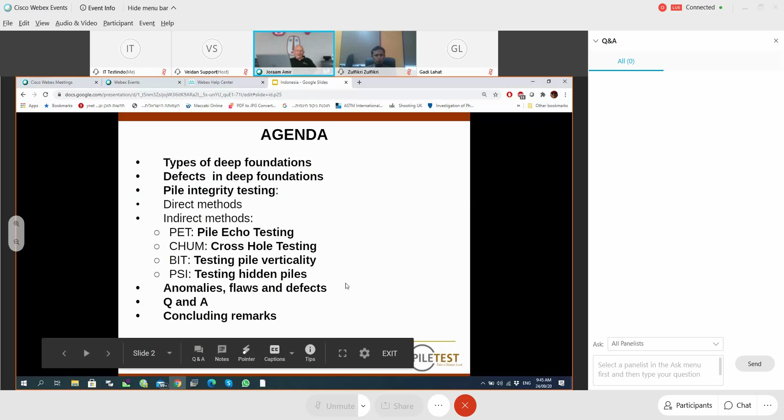I'll try to put some order in three terms that are very frequently mixed. And these are anomalies, flaws, and defects. And I hope we'll have some time for questions and answers and some concluding remarks. First of all, what is a pile? A pile is a slender, deep foundation, either prefabricated or cast in situ.

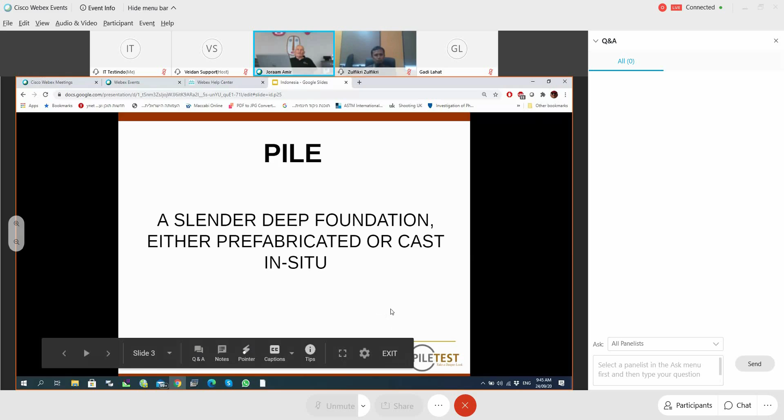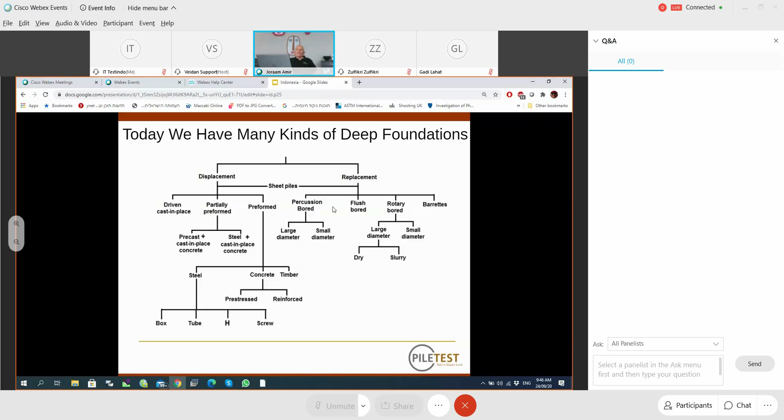these piles is not very good. At least the contractor puts some steel in the ground. Some contractors even do not put steel in the piles. This contractor was very clever. He knew that he is going to produce the piles in sandy soil, which is not very stable. So we used some casings out of cardboard. But you see that below the casing, there was some collapse, and of course, the pile is not good.

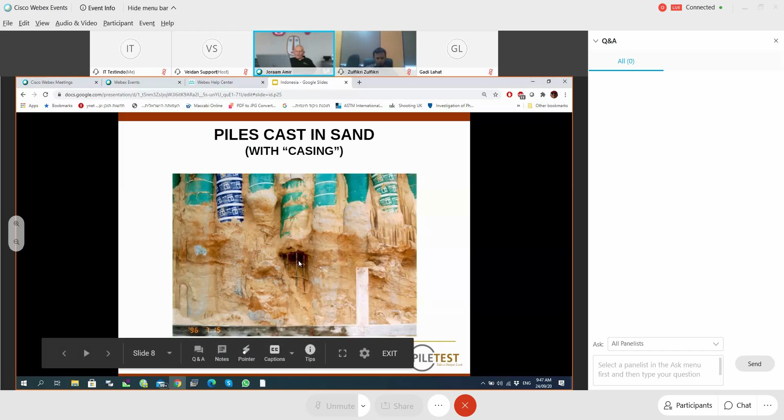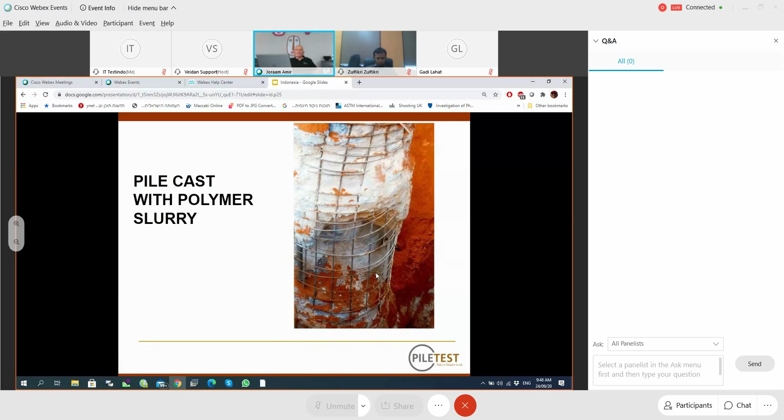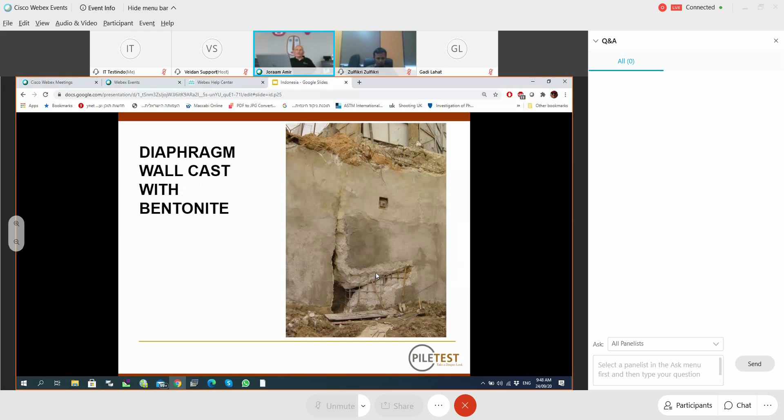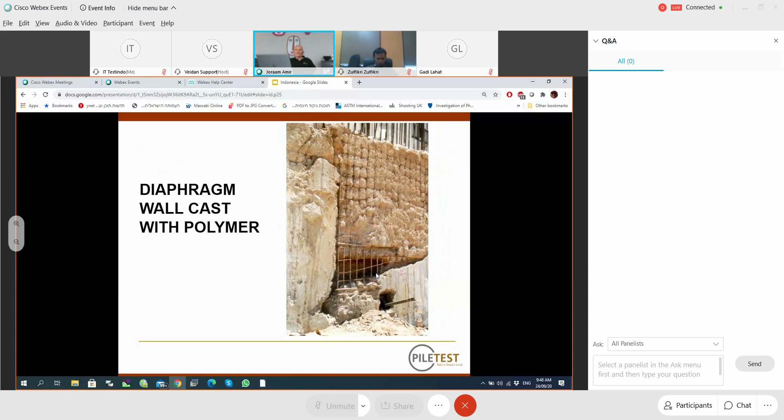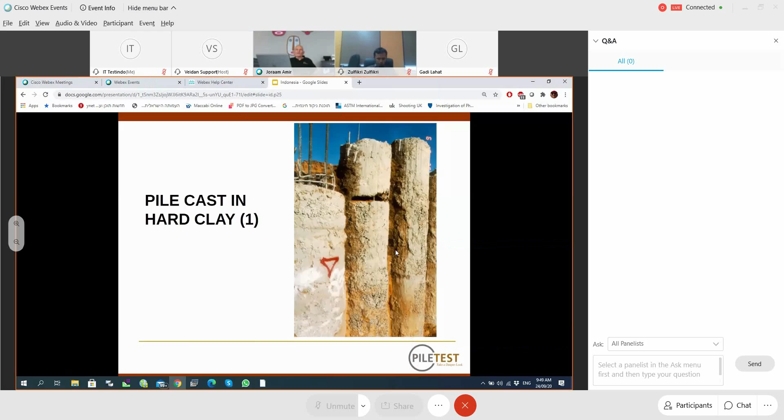This is a diaphragm wall for a basement, and it was cast with bentonite to support the excavation, and still the end result was very unsatisfactory. Here's a diaphragm wall cast with polymer slurry. Different technique, but the results were not much better, even worse. Now, even under ideal conditions, when you have stable ground, hard clay, no groundwater, no chance for collapse, you can have this situation. Or this one, which is almost a complete discontinuity of the concrete.

Now, how many flaws or defects do we have in piles normally? I collected some information from our files and from literature. For instance, 1.7% of piles with flaws, this is from the early 70s and 80s of the last century. Now, this is a very low percentage, and for two reasons. First of all, at that time, the testing instrumentation was very rough and very inaccurate. So there were many defects we couldn't discover or expose.

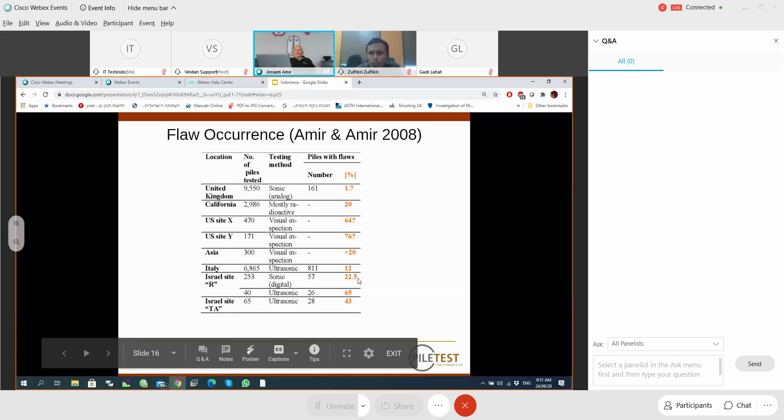And the second reason for this low percentage is that in this case, the testing was done by a contractor who tested his own piles. And of course, it's very difficult to be very neutral and very objective under these conditions. No contractor likes to admit that he's producing faulty piles. But when we go to different places in the world, California, somewhere in Asia, Italy, Israel, we see that the percentage of piles with flaws can be much, much higher. And it can be alarming. And this raises the question of pile integrity.

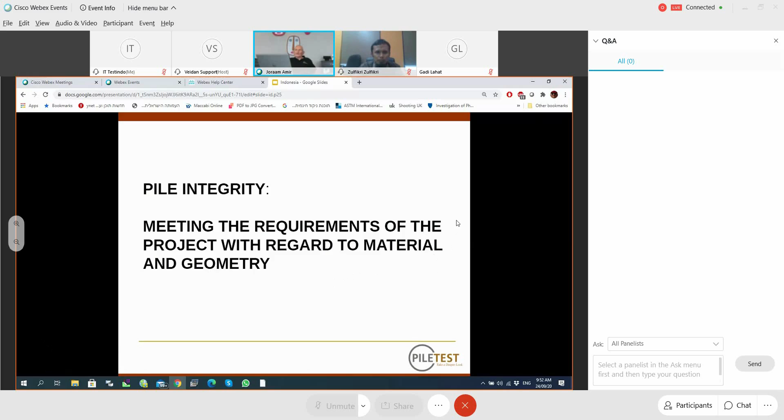There are many definitions of pile integrity. The way I define it is meeting the requirements of the project with regard to material and geometry, which means we have drawings and we have the specifications, and these determine how the pile should look like and what is the material it should be constructed of. Now, sometimes we have integrity problems, like flawed material. Here we have a pile produced of good concrete, and somehow here we have a pocket of poor concrete, result of poor construction technique.

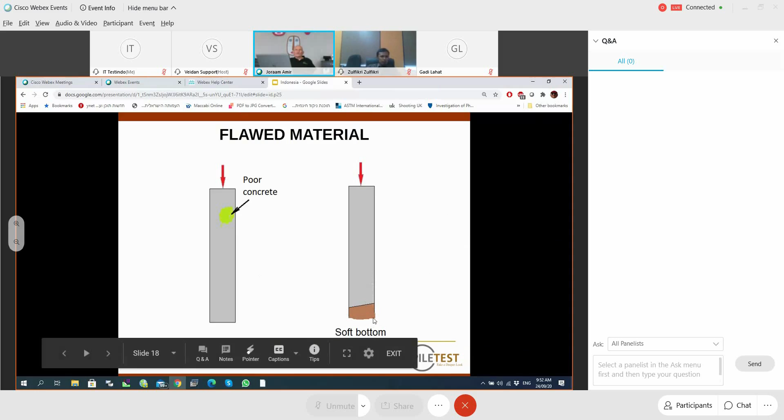Here is a soft bottom, which means during casting or some collapse, the contractor didn't clean the bottom very well, and we have the bottom or the toe of the pile consisting of soft clay or soft debris. Now we can have an abnormal geometry. For instance, a pile can be short. Sometimes because the drilling equipment was not powerful enough to penetrate the hard soil. Sometimes because the contractor didn't have a strong enough machine or just wanted to save, assuming that he will never be

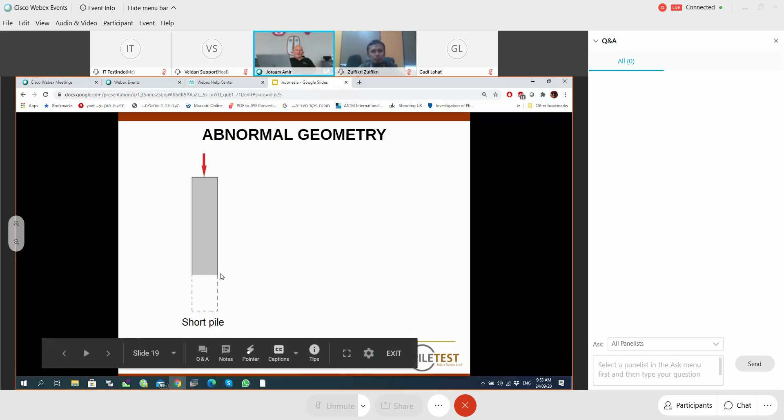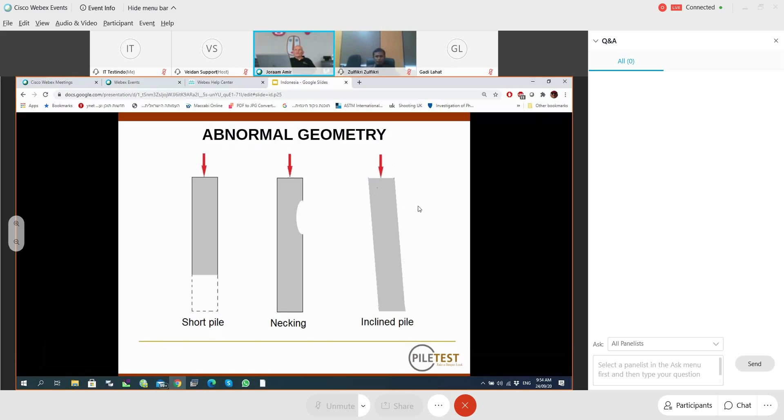checked. Here we have necking. This is a collapse that happened during casting, and instead of concrete, we have here mud or some foreign material, and we get an abnormal geometry of the pile. And sometimes we can have an inclined pile, a pile which had to be vertical is not very vertical. And this is, of course, also contrary to the specifications.

Now, we have integrity testing techniques, which I'm going to tell you about today, and they are used to discover defects before they can cause any damage. If you build a building or a bridge or any other structure on faulty piles, they can cause a lot of damage. If you manage to locate and expose these piles before you build on them and before you apply the load, you can avoid a lot of damage.

There are two families of integrity testing methods. The first one and the oldest one is excavation. If you suspect that your pile is not very sound and there may be some defects, you can just excavate around it, and sometimes this is what you discover. Of course, you must have some suspicion that something is wrong with this pile. Of course, you cannot go very deep with this method, especially if you have high groundwater level.

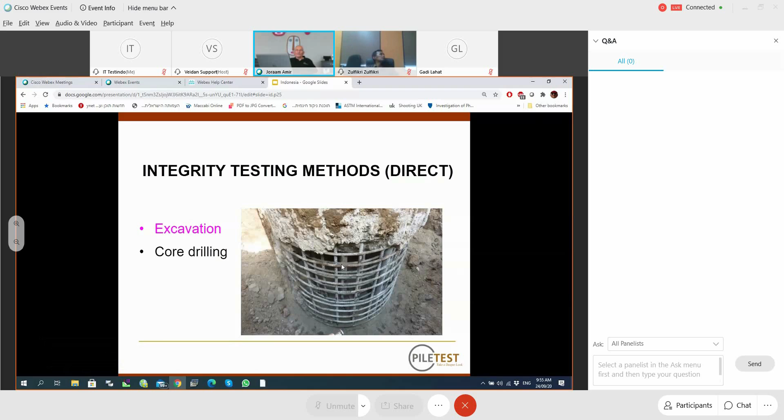The other direct method is core drilling. Here you can go very deep inside the pile and get a very good sample of the concrete. Of course, this relates only to a very small percentage of the cross-section of the pile.

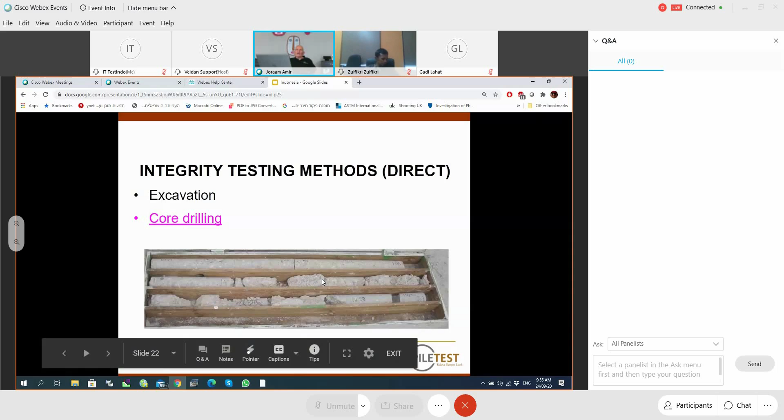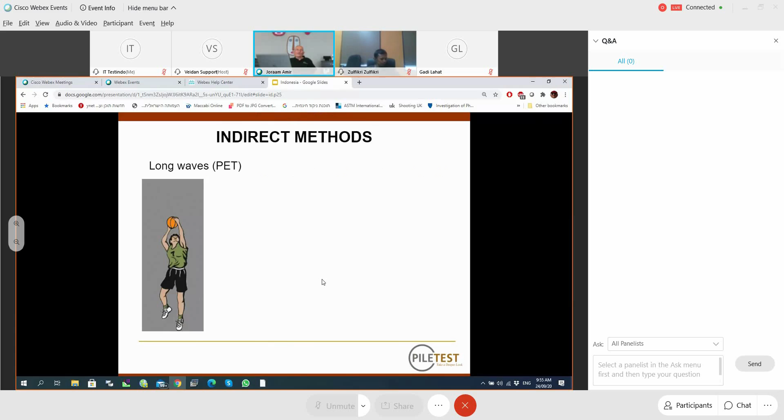In addition, we have the indirect methods. And here we have two families of methods. We have long waves and we have short waves. On the left, we see how the long wave behaves in the pile. It can move only in one direction, either up or down. The short waves, or the ultrasonic waves, can behave like a mouse. They can go up and down, sideways, and in all directions. So we have two families of indirect methods, the long waves and the short waves.

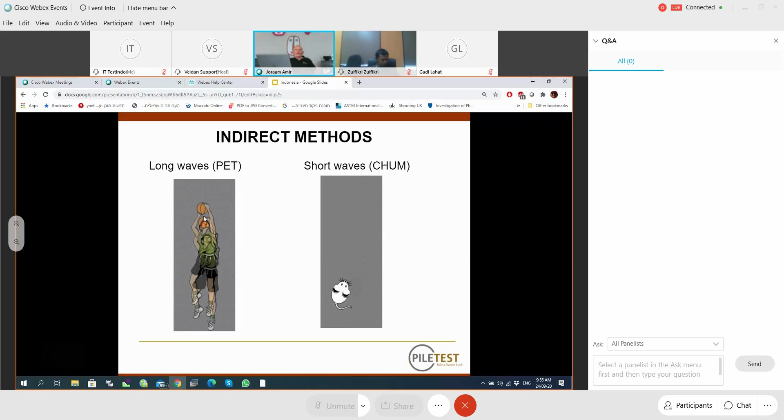The first long wave method is the sonic method, or the sonic echo impact method. Here we'll see soon a short video showing how this method is applied on site. Do we have that video?

Yes, we have. PET, Pile Echo Tester, Low Strain Impact Testing. The mission: test the integrity of 12 concrete piles on this construction site. The tester goes to the first pile and prepares the top for testing. You have to clean the top of the pile first. A small amount of special putty is attached to the bottom of the PET to get good contact. The PET is pressed against the pile top. The top is lightly hit with the hammer. A compressive wave travels down the pile. The energy of the hammer is enough to reach the toe and is reflected back from the toe.

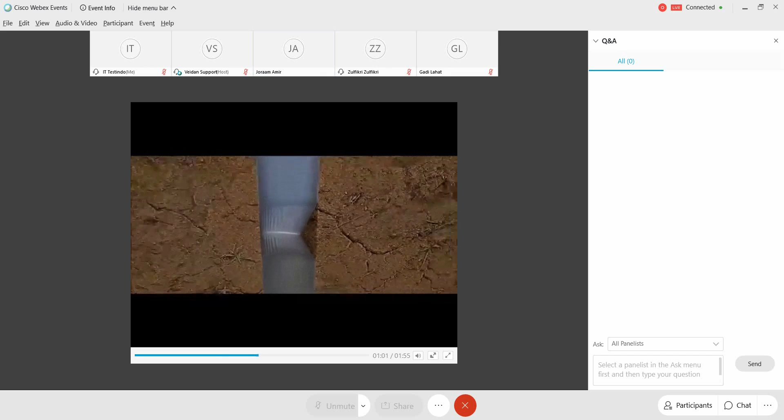The blow is recorded on the screen. Good pile. The next pile has a defect that reflects the wave. Wave hits the defect. The reflectogram on the screen shows a necking at a depth of 5 meters. That's all. The test results are now analyzed in the office and the report produced.

So this, in short, is the long wave method, the PET. The instrument works very well with a smartphone as a data logger. So what you see here can be a smartphone or a tablet. And if you have a smartphone, you can use all the other properties of the smartphone. For instance, take a photo of the top of the pile, or register the GPS coordinates of the pile. And of course, you can save the results in the cloud, and therefore they can reach the main office on the other side of the globe immediately. So you don't have to wait for the results until you return to the office.

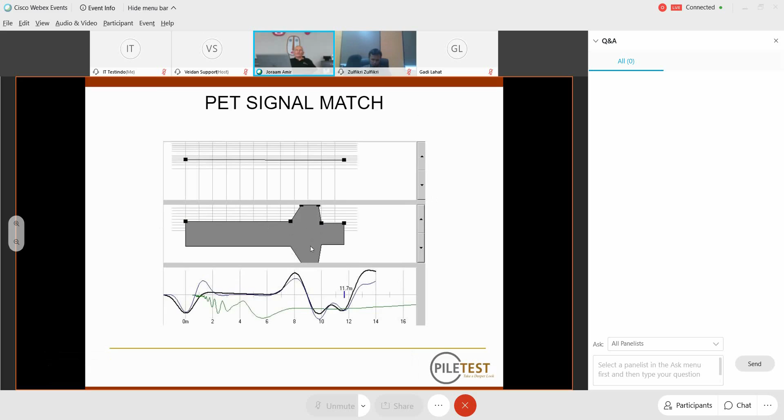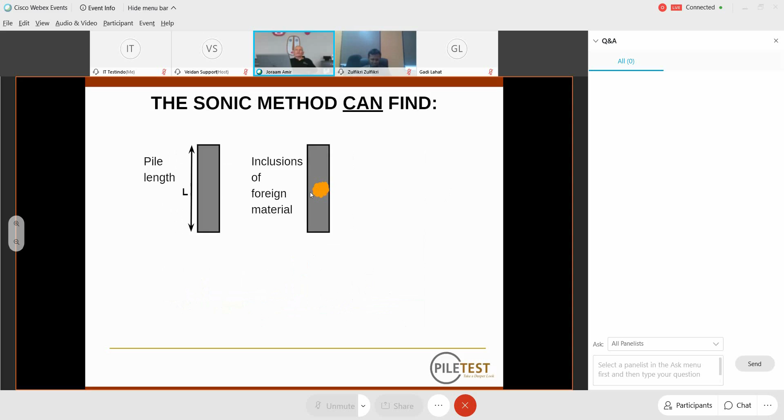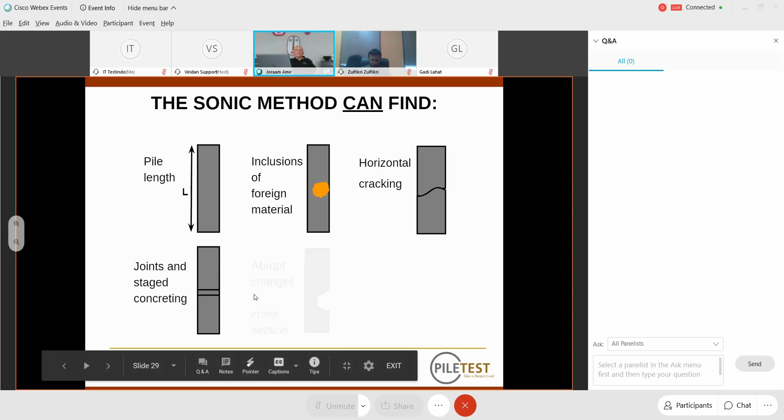Now, this method can find the length of the pile, inclusions of foreign material, horizontal cracking, if there is, joints and staged concreting. If you pour the concrete, wait some hours, and then continue concreting, you can have some separation here. Large, abrupt changes in cross-section, like this, and distinct changes in soil layers.

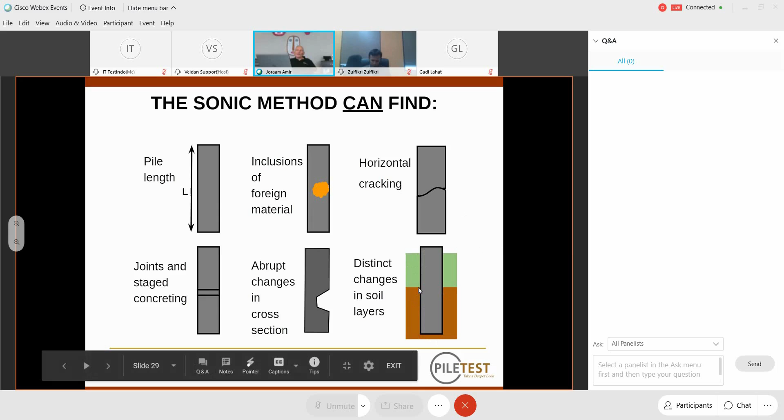This really is our biggest problem. If, for instance, the pile is cast in ground and then penetrates rock, the rock will produce a different kind of toe reflection. Of course, the PET cannot find anything if the top of the pile looks like this. So this is really a very poor technique to prepare the piles for testing.

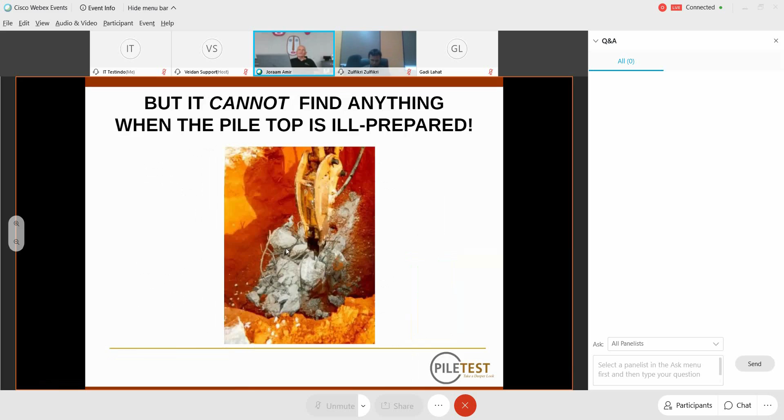Advantages of the sonic test. First of all, it's quick, it's inexpensive, it's universal. It can be used on concrete piles, wooden piles, even steel piles in certain cases. And there is no pre-selection because you don't need any special preparation. You can test any pile.

The problem of the PET and all other instruments that are operated and working on the same principle is that there is a limit to the depth to which it can penetrate. And the limit is determined by the slenderness ratio, L, the length of the pile, over the diameter. Now, with an SPT of 5, standard penetration resistance of 5, soft soil, you can test piles up to 40 to 50 diameters deep and still get reasonable results. Of course, if you have an SPT of 30 or 40, you cannot go deeper than 25 or so diameters into the ground.

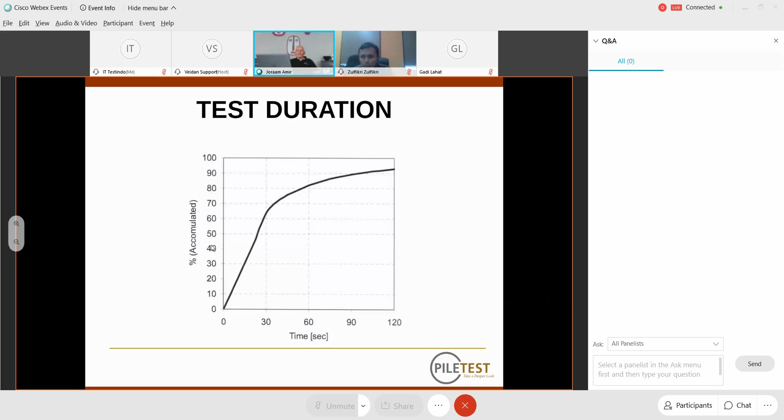This is a very interesting graph. The test duration in this method. The method, as I said before, is very fast. In 30 seconds, you can test about 65% or 2/3 of the piles within 30 seconds net, not counting the time it takes to move from one pile to the other. And you can test 90% of the piles in less than 2 minutes. These are results taken from about 70,000 piles from all over the world. So the method is very fast.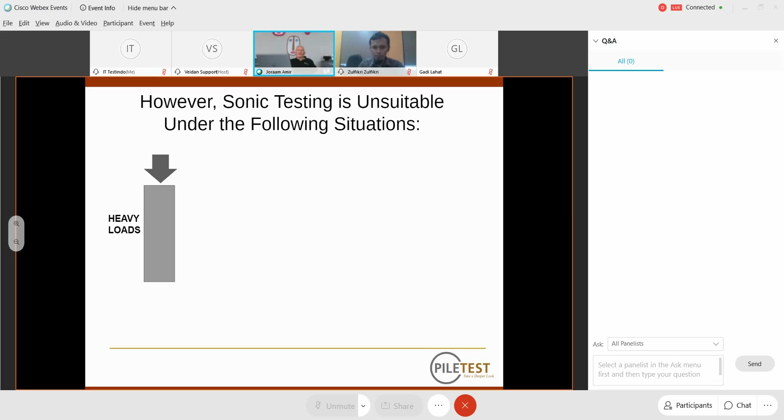There are situations where the sonic testing or the PET is unsuitable at all. For instance, if you have large piles carrying heavy loads. In this case, your method using long waves is not accurate enough. It doesn't have the resolution you are looking for. Here is another example where you cannot use this method.

Sometimes when you have to produce piles inside the urban area in time, the site is very small. You cannot move around very well with the drilling rig. So what you do, you start drilling the piles from the street level here, and you cast them only to the basement level. And then you can start digging, and you don't have to operate your large drilling rigs inside the crowded basement. Of course, this kind of pile cannot be tested with the PET.

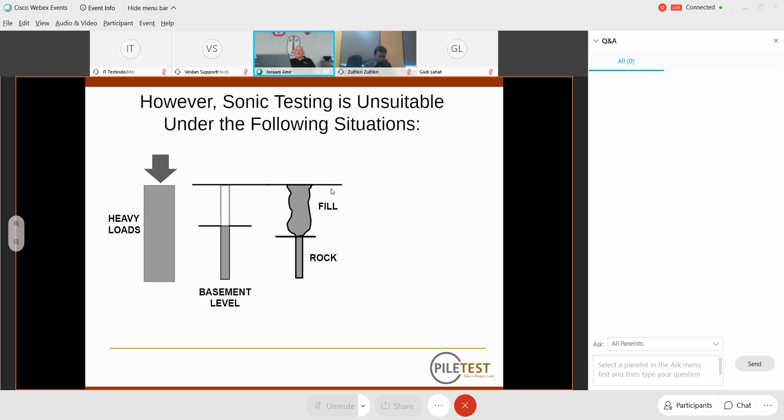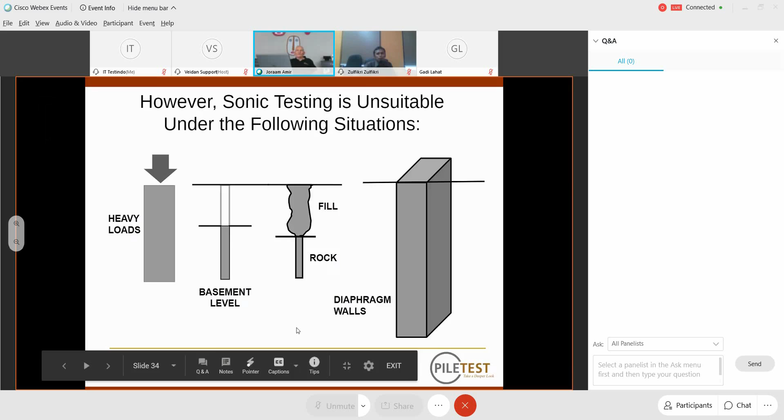Here is another example. If we have rocky terrain, above which we have fill made out of rock particles, the rock particles produce a lot of reflections. The rock has a lot of friction, which prevents the penetration of the signal. And this is another example, a diaphragm wall. A diaphragm wall is not a one-dimensional element. So the theory behind the PET doesn't apply to diaphragm walls. And we have to use a different method. The different method we use here is the CHUM, which we'll see soon.

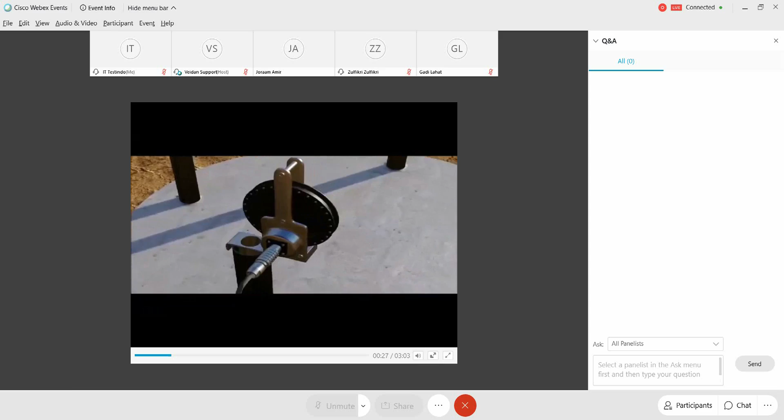On this site, large diameter bored piles were constructed. On the surface, they all look perfect. But are they? CHUM, compatible with ASTM standard D6760, looks for the subsurface imperfections through the access tubes installed.

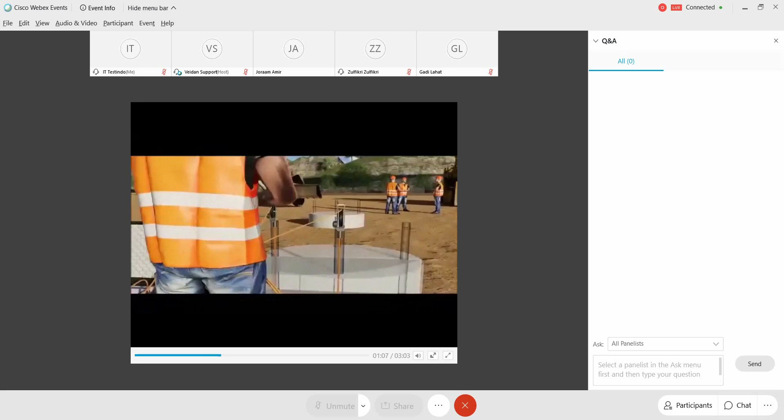Depth meter pulleys are placed on top of the water-filled tubes. Ultrasonic dual-function transceivers are lowered into the tubes, and lowered together all the way to the bottom, which may be 100 meters below ground level. When the sensors are level, the computer connected to the CHUM gives the order: pull.

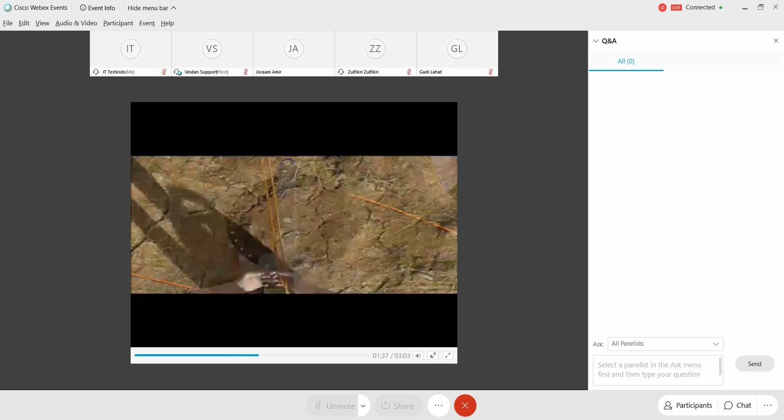While both cables are pulled together at a speed as fast as 2 meters per second, the location of the sensors is shown on the screen in real time. Ultrasonic pulses are continuously sent from the emitter to the receiver, and anomalies, such as increased arrival time or lower energy, are immediately displayed. CHUM automatically adjusts signal gain for optimal signal quality under variable conditions. CHUM also supports 2D and 3D tomography.

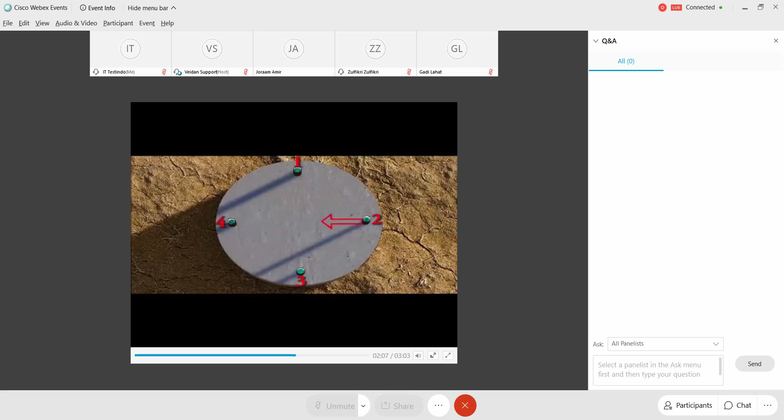Both sensors exit the access tube together, and the ultrasonic profile is already on the screen: first arrival time, relative energy, wave speed, and the waterfall presentation. Other profiles are logged the same way. If we have 4 tubes, we have 6 profiles, covering the whole cross-section area of the pile. The data is analyzed by the engineer who checks for any inconsistencies, adds his comments, and prints the report.

This, in short, is the CHUM, our cross-hole ultrasonic monitor. It is portable, rugged, and productive. Due to the use of a detached computer, the CHUM will never become obsolete. Thank you. By the way, when saying rugged, I recently saw a system which we sold 10 years ago, and it's still in action, working every day of the week, 5 or 6 days a week, 10 years.

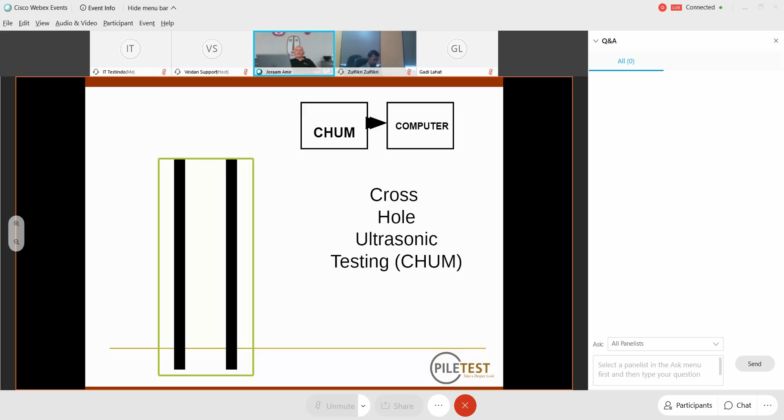So it's pretty rugged. Now, what are the components of the system? Of course, we have the access tubes in the pile. We have the CHUM and the computer. By the way, all our systems have a separate computer, not embedded in the CHUM, and therefore, after 10 years, the CHUM can use a new computer, when all other systems that are 10 years old have a computer that long ago does not function. We must have a depth meter to monitor the depth of the sensors, which we have hanging from the cables. Now, after reaching the bottom, we pull both emitter and receiver together.

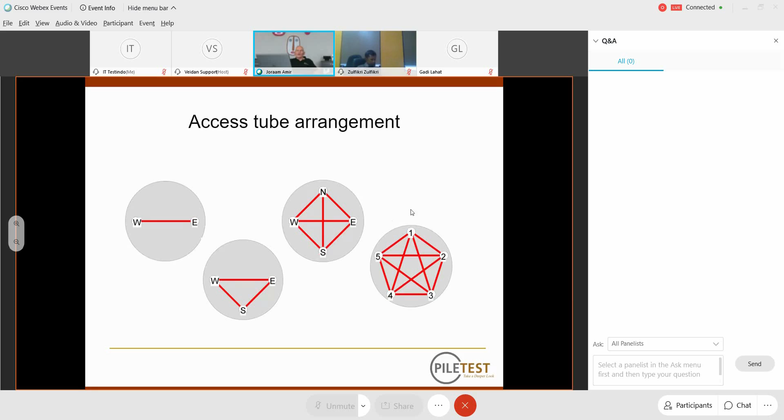Now, how many access tubes do we need? If we have a small pile, we don't have room for more than 2. A larger pile, 3, 4, 5. I even saw some very large diameter piles, 3 to 4 meters in diameter, huge piles with up to 10 access tubes.

ASTM standards say that you use 1 tube for each 30 centimeter diameter. So if you have a 1 meter diameter pile, you need 3 tubes, 1.5 meter, 5 tubes. In the Far East, which means China, Vietnam, Malaysia, normally they use 4 tubes regardless of diameter. Even on very large piles, they use only 4 tubes. I don't know what's the situation in Indonesia.

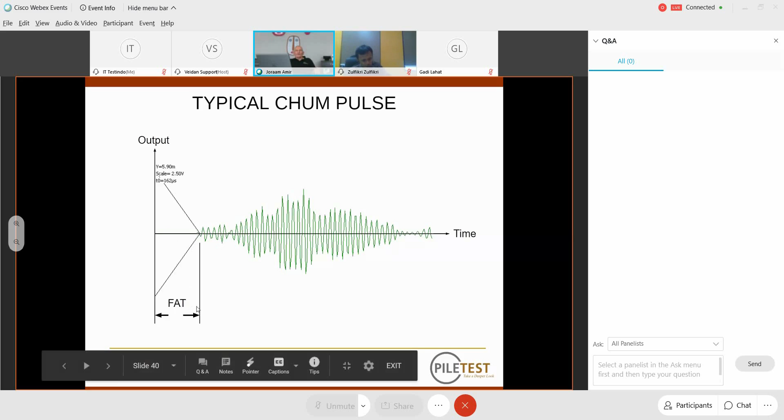Now we said that we have an emitter or transmitter sending the ultrasonic pulses, and this is what the receiver is getting. This is the time base. Here, the emitter is producing the pulse. While it's traveling, the receiver is stationary. And then it starts getting the waves arriving. The first arrival time, or in short, FAT, is recorded by the system automatically.

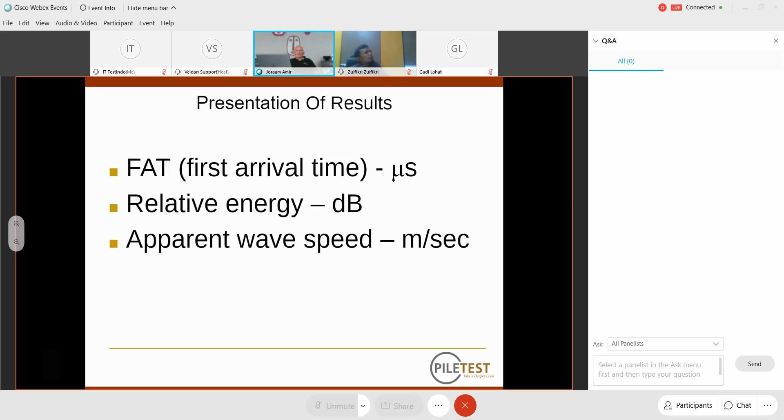How are the results presented? First of all, as I said, the FAT in microseconds. The relative energy, an important parameter. We can calculate immediately the apparent wave speed if we take the separation of the tubes and divide by the time. And we have the waterfall presentation. All these are requirements of the ASTM standard.

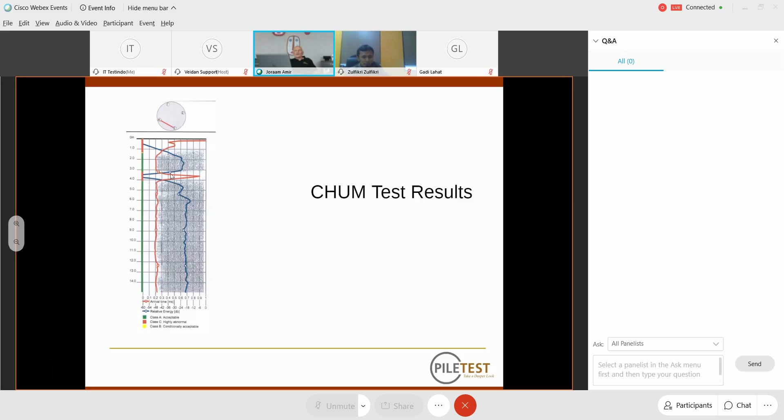And here is a typical result. You can see immediately the red line is the FAT. You see that at this depth, between 3 and 4 meters, the FAT is becoming very large, while the blue line, the relative energy, is becoming very small. This means that here at this depth, we have a discontinuity or a defect.

Now, if we want to know more about this defect, we can do a tomography. Tomography means looking at the defect not only in the horizontal direction, but also from diagonal directions, above and below. And then we can plot the shape of the defect on the screen. In this case, the system is the same one, but we have to use 2 depth meters. So the system will know at each moment where each of the sensors is.

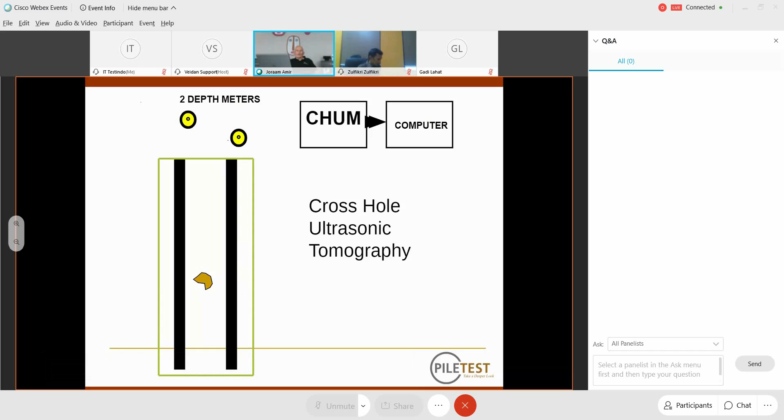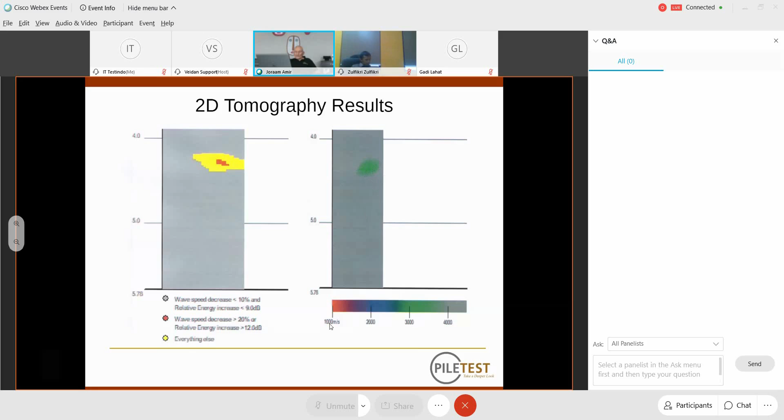This is another one. Here we have some shade, some blowing of the horizontal defect. Here you see quite well how the defect looks, both in the vertical and the horizontal direction. Now the CHUM is also a utility for calculating a 3-dimensional tomography, where we take the results of all the tubes and combine them to get a 3-dimensional picture of the pockets of foreign material or defects, if you like.

We can have a horizontal cross-section at any desired level, and we can have a vertical cross-section in any direction. The system also measures the relative strengths of the cross-section. And this is something that structural engineers would like very much to know if they have a problem in the pile: how much the cross-section is still effective. So our 3D tomography provides all the answers.

Now, a few words about three terms that are very often misused: anomalies, flaws, and defects. And I must admit that even seasoned testers and engineers with a lot of experience do not know the difference. Now, here are the definitions. An anomaly is any irregular feature in the non-destructive test results.

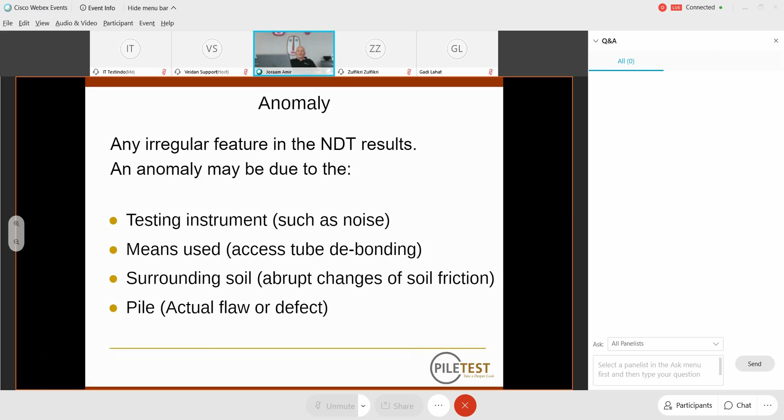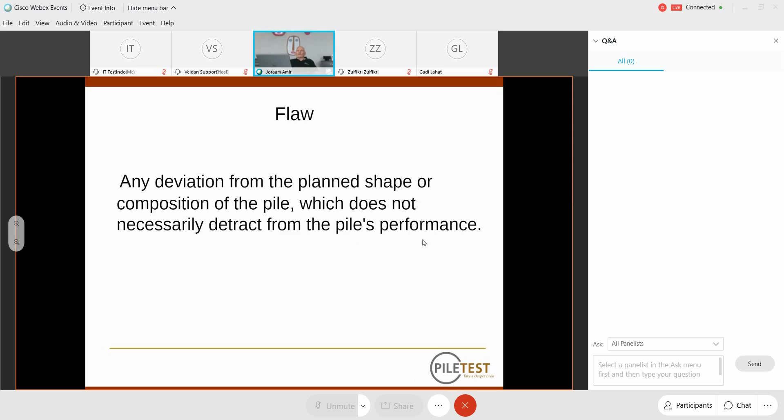What is a flaw? Any deviation from the planned shape or composition of the pile, which does not necessarily detract from the pile's performance. So if you have a very small clay pocket close to the bottom of the pile, and the pile is a friction pile, not an end-bearing pile, this may be a flaw. It does not detract from the pile's performance, and that's very important. On the other hand, a defect is a flaw that, because of either size or location, may affect the pile's capacity or durability. So if you have a large flaw close to the top, where the stresses are the highest, you can have a defect.

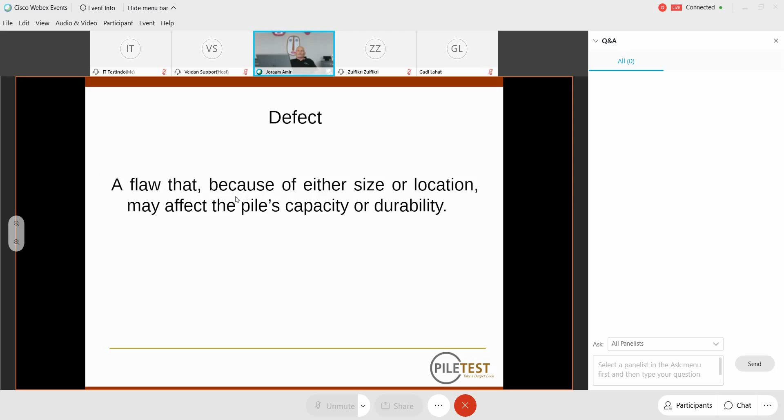Now, what do we do with flaws and defects? The test laboratory, first of all, is responsible for reporting anomalies, all anomalies, and for assessing which anomaly comprises a flaw. The geotechnical engineer and structural engineer are jointly responsible for the decision which flaw comprises a defect, because they know what the pile is supposed to carry and how it's supposed to function.

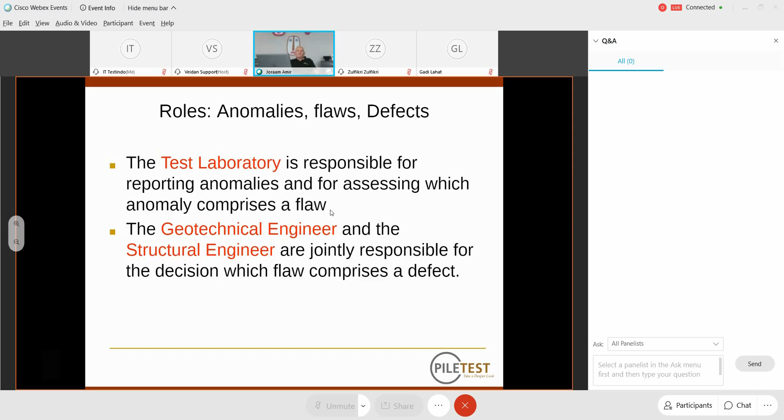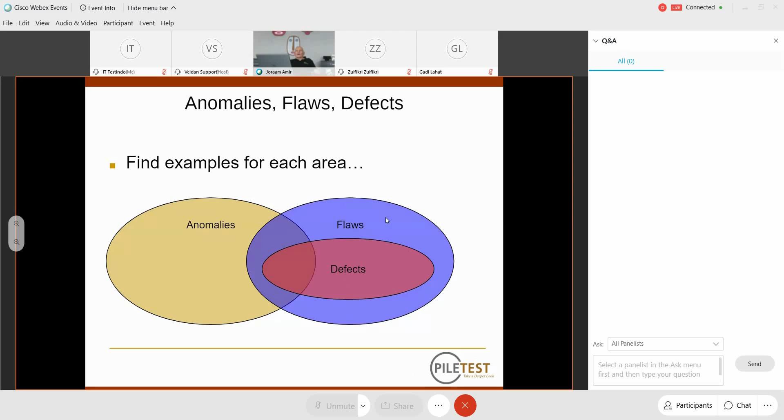Here's something which is called a Venn diagram. With our testing, we have a lot of anomalies. Some of our anomalies are because of any irregularity in the pile, and they cause flaws, the blue area. Not all flaws are defects. Some of the flaws are defects, as defined by the engineers.

The next item and the next instrument which we have, and this is a very recent, modern, and new technology, is the BIT, the borehole inclination tester. The BIT is a universal instrument for testing the inclination of piles, bored piles, even driven piles. Even sheet pile walls can be tested with the BIT, with suitable access tubes. We'll soon see how the BIT operates.

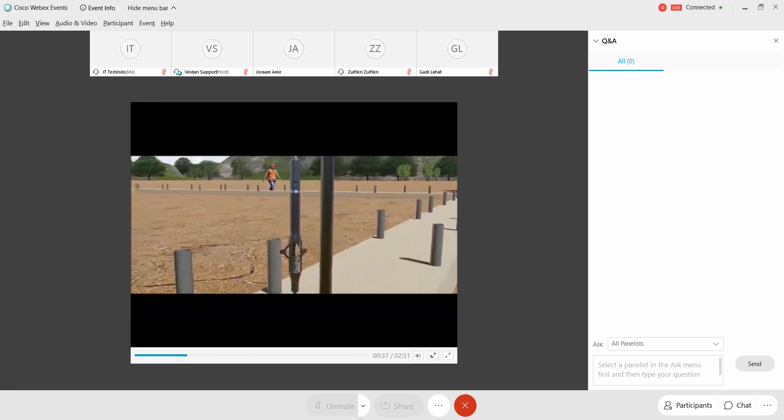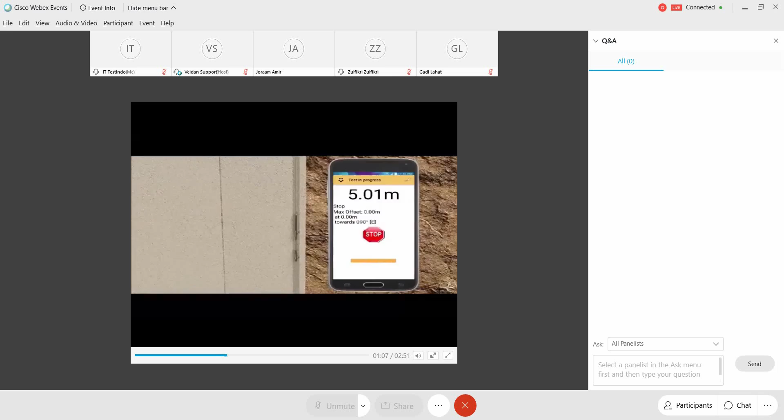The BIT is lowered to the first stop at 5 meters. With the stop sign switched off, the BIT is lowered to the next stop. The procedure is repeated all the way to the bottom. The software is on the smartphone. The BIT is now raised, stopping at the same stations. The BIT is now at the surface for the final reading.

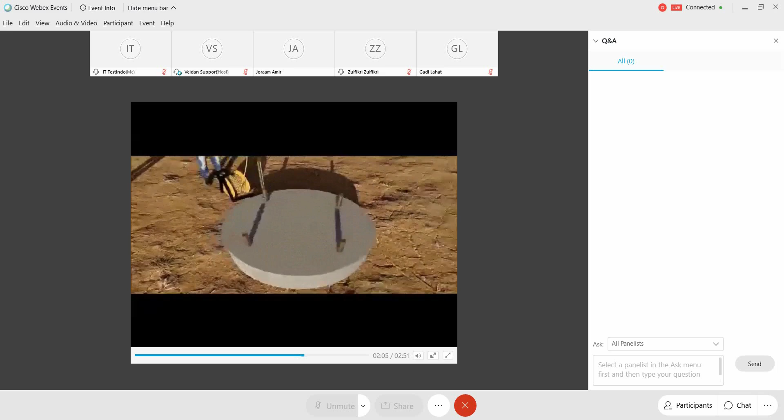The top view is now seen on the screen. The side view is plotted on the screen in the desired direction. The deviation of bored piles is measured the same way.

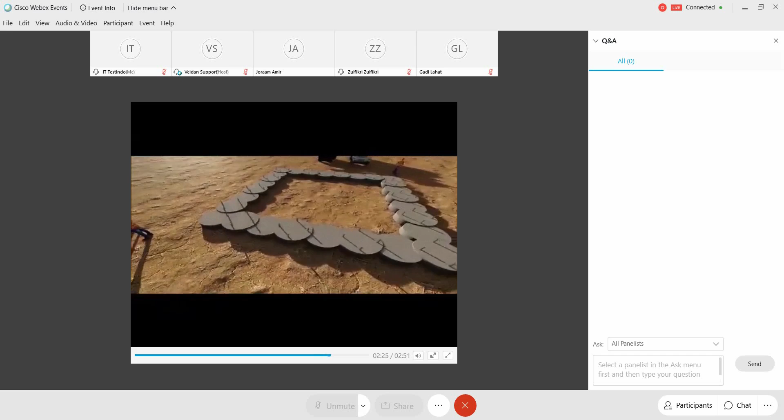The verticality of secant pile walls is of utmost importance. The bit can also test simple low-cost plastic tubes for geophysical testing, so you don't need special tubes as you normally need with other inclinometers.

Now, the borehole inclination is determined by almost all specifications I know of. These are the specifications of the Federal Highway Administration in America. They allow 20 millimeters per meter, or 2% deviation, for normal shafts. They allow a little more, 4%, for battered or diagonal shafts or piles.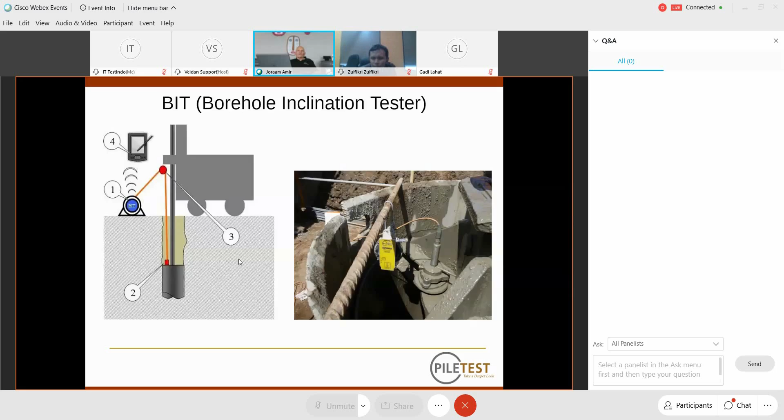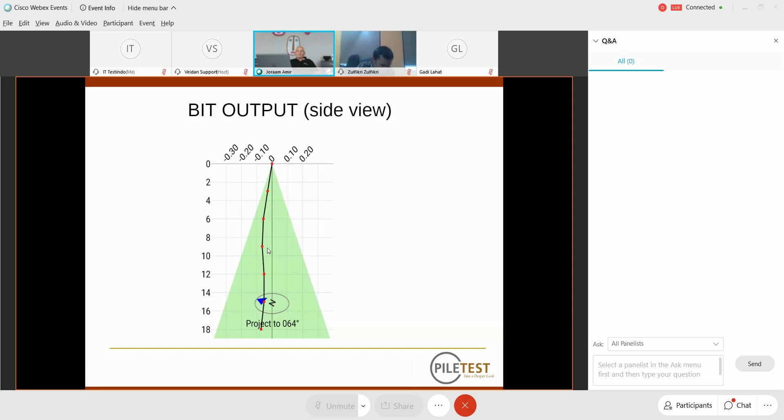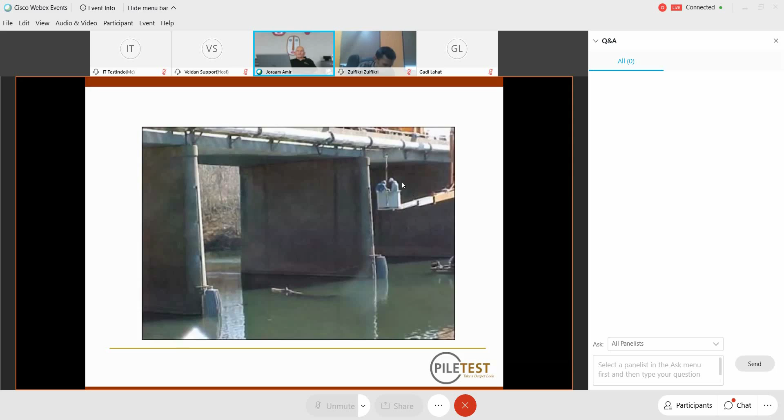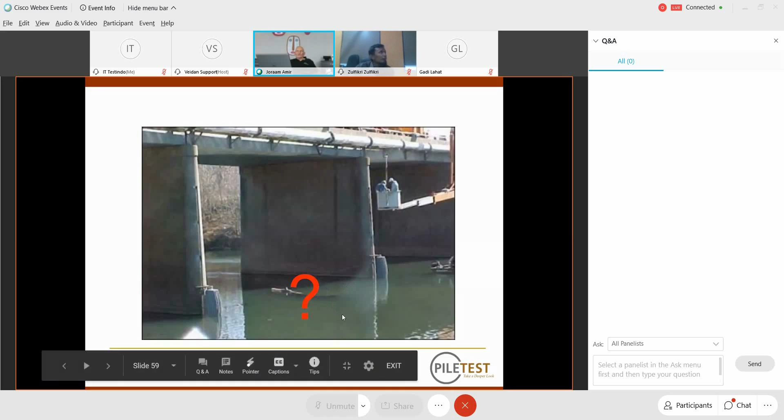The last system which I'm going to present to you is the parallel seismic system, the PSI, to determine unknown and unseen piles. Here you have a bridge. We have a discussion in our office if this is a crocodile or just a piece of floating wood. But of course, this bridge is founded on certain foundations. We don't know what kind of foundations there are. They may be deep foundations, they may be shallow footing foundations, we don't know. So the PSI, the parallel seismic method, is supposed to check the depths of these piles.

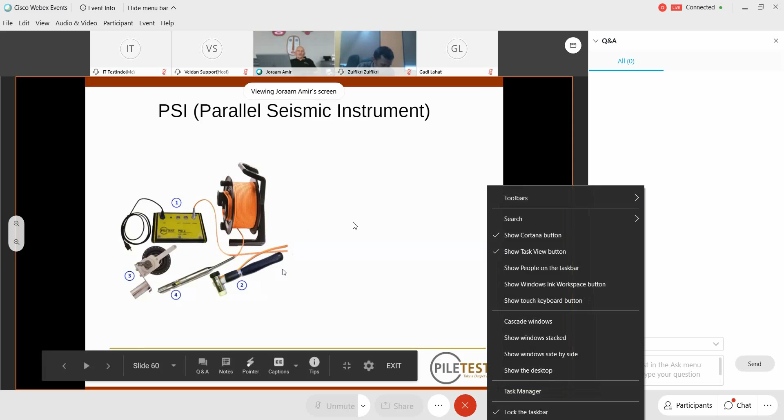Here is our PSI system. We have a hammer with an impact switch connected to the instrument. Here is a hydrophone, the automatic depth meter, and all the electronics are inside the cable reel. Here is how it's operated. You hit with the hammer on the superstructure. Even if you don't see the pile, you hit any point of the superstructure. The waves go down inside the foundation or inside the pile. From it, they are deviated into the ground and to the access tube, which is filled with water. This is the hydrophone, which is sensitive to changes in water pressure. And the computer monitors the depths from the depth meter, with the waves recorded by the hydrophone.

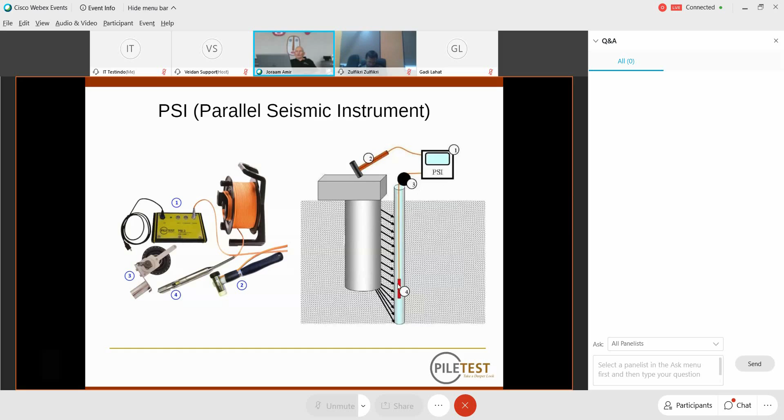This is the plot we get. You see that these are the first arrival times, which are arranged very nicely on a straight line. And from this point onward, there is a break in the slope of the line. This is exactly where the toe of the pile is, at 18.3 meters depth. So you can test piles even if you don't see them at all.

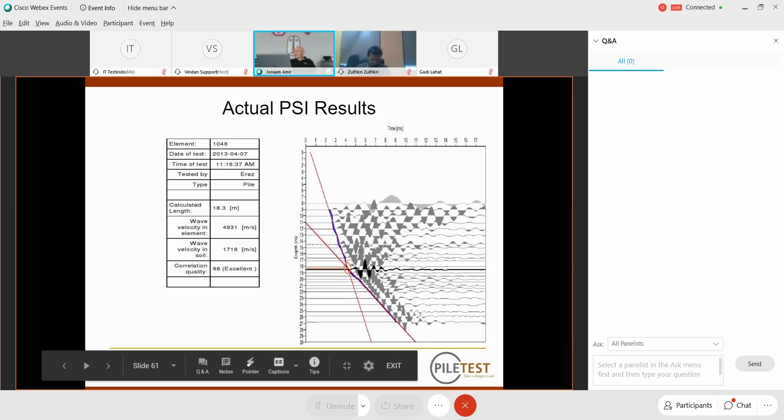And some conclusions. First of all, in piles, defects may and therefore will occur. So I hope you didn't have any illusions until today, but if you have, you can forget your illusions. There are defects. Moreover, innovation in piling is usually accompanied by an increased defect rate. You bring a new technology to a country, and in the beginning, until engineers and contractors master the method, there may be more defects. Integrity testing techniques, which I've presented to you today, are used to discover defects before they can cause any damage. And before is a very important word here.

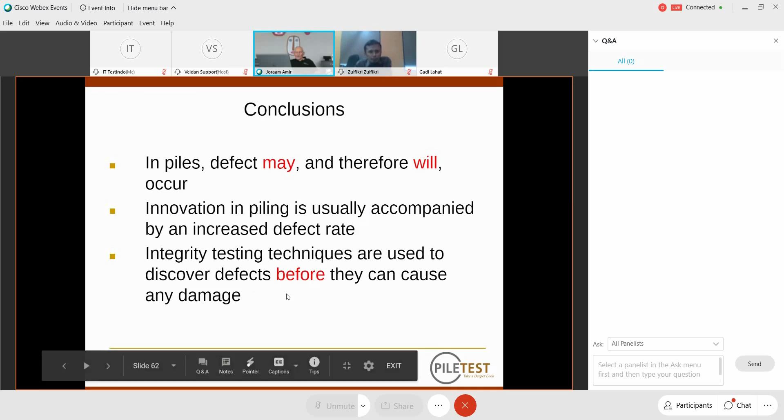Discovering damage after it happens is not very good engineering. Current integrity testing techniques can discover most important defects. Unimportant defects, if they are not discovered, do not interest us too much. And I must admit, most. Sometimes there are defects that cannot be discovered because they are too deep in the ground, or because our most modern equipment is not capable enough. Of course, you must know the capabilities and limitations of the method you use, and, very important, test all piles.

Some engineers specify testing 10% of the piles, or 20% of the piles, or 50%. This is very poor methodology. You have to test all piles. And I showed you with the PET, the pile echo tester, that testing is very fast. The testing, therefore, is also very inexpensive. So we encourage you to test all piles.

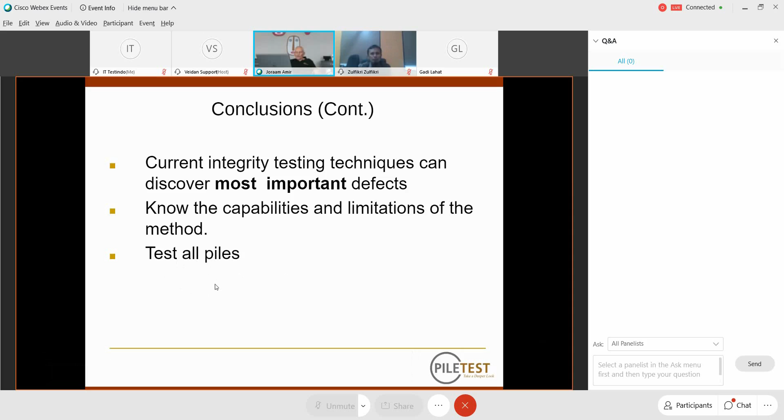Zulfikri, it's your screen. You can speak. Sorry. Do you want to add anything? Is it clear enough, or do you want to add anything? No, clear enough, clear enough. Clear enough. Good.

Are there any questions? You can see the question has already arisen in the Q&A room. Yes, I'll show you in a minute. Joraam, yes, here you go. I put the questions here, and I marked a few of them in yellow, so you can answer them.

The first question: how many meters maximum can be tested by the PET? I hope it's the question of depth. And how many times do you hit the concrete with the hammer to make sure the depth of the pile is reached? Okay, the answer is very simple. It depends on the condition. If the pile is not very deep and the ground is not too hard, and the top is well prepared, nice clean concrete, just a few blows, 5 or 6 blows, and if they are all identical, the PET takes the average of the blows and shows it on the screen, and you get an excellent result.